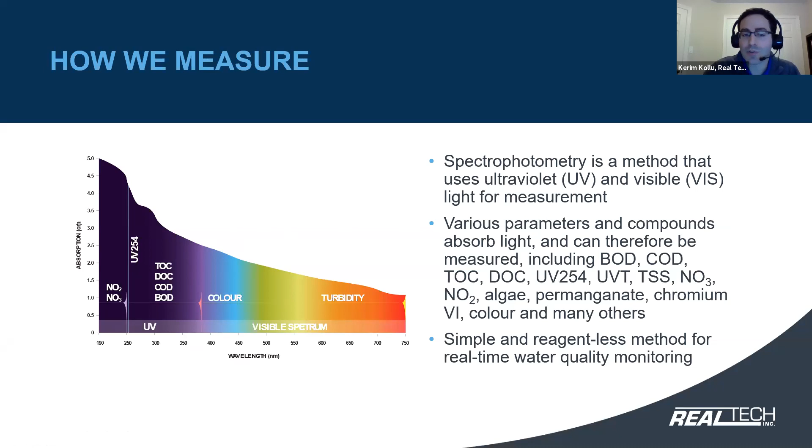One thing about using light technologies is that light sources produce light in a fluctuating way. The light fluctuates a lot during real-time operation, and that has to be compensated for. Real Tech has innovative ways to deal with this, such as patented and proprietary technologies to overcome this problem, and we also use different light sources.

Now, I mentioned this because it's really important. When we talk about real-time monitoring, it's actually really important to realize what the goals of the end user are. You might be looking for something that gives you trending information that helps with real-time process control, and therefore you may not need very high accuracy.

The importance of that is that the solution that works for you does not need to be expensive. If you need accuracy, you might want to spend a little more money and get a more expensive solution that's more accurate, which will also require more maintenance. But if your goals are more about process control or simple trending, you might want to opt for lower accuracy, but also lower maintenance and lower cost.

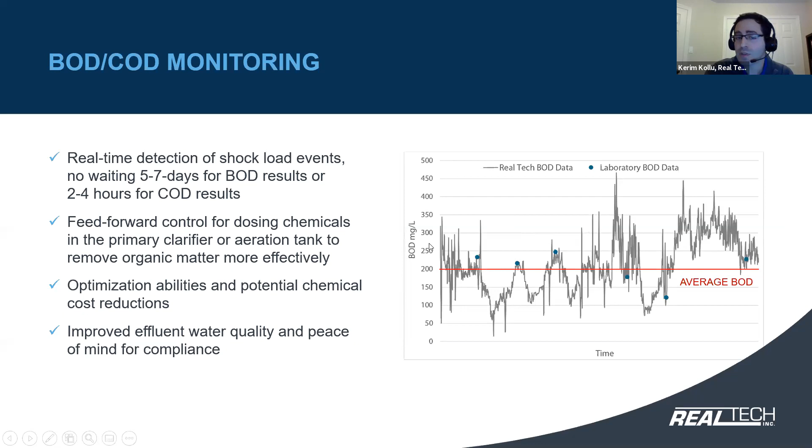Here we're looking at real-time data from one of our customers, over the course of 2 days. We're looking at BOD. The gray line is the real-time BOD fluctuation, verified with laboratory BOD data at several points. The importance of this graph is that if the utility was to look at the average BOD, all they will have is 200 milligrams per liter average BOD. This is useful information, but only to an extent. Throughout the day, the BOD goes much lower and much higher, and therefore there's much that can be done with process control.

One example of how the process can be controlled is where we see a lot of pain points in smaller wastewater treatment plants, where a sudden spike in the organic load coming in can really cause trouble with the aerobic system, the biological treatment system. The way smaller wastewater treatment plants deal with this is by boosting chemically enhanced sedimentation, which increases BOD removal. How much chemical is added is closely tied to the level of organics coming in, and therefore with real-time monitoring, it's very easy to optimize how much chemical to add.

Even if you're not looking at BOD, we can detect events in the incoming wastewater. What I mean is that because these sensors are real-time monitoring sensors, over time they learn the water, and the more they're installed, the more they know about it. Therefore, they're able to tell you what is a normal fluctuation and what is an anomaly, when you have a spike that's different than all the other spikes that happened before. Working through this data, we're able to tell our end users when these events happen, and what kind of events happen, which can be very valuable information as well.

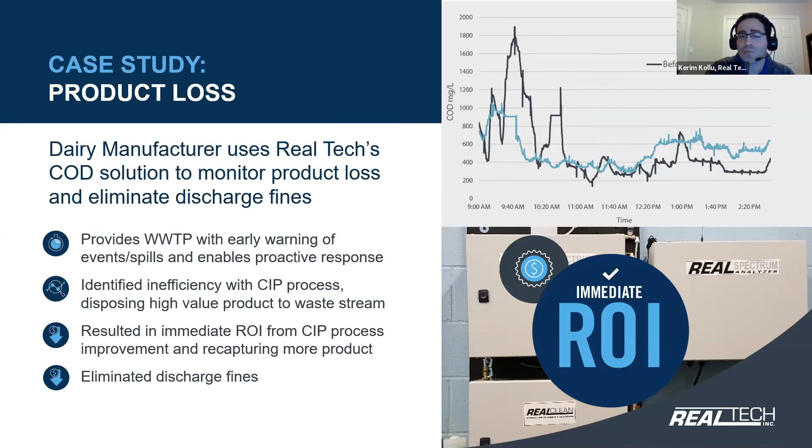So the approach here is a very multidimensional one. We don't look at just one parameter because BOD tells you the sum of organics, yes, but there might be other things happening with your process, and it's possible to monitor that using UV-visible spectrum absorption.

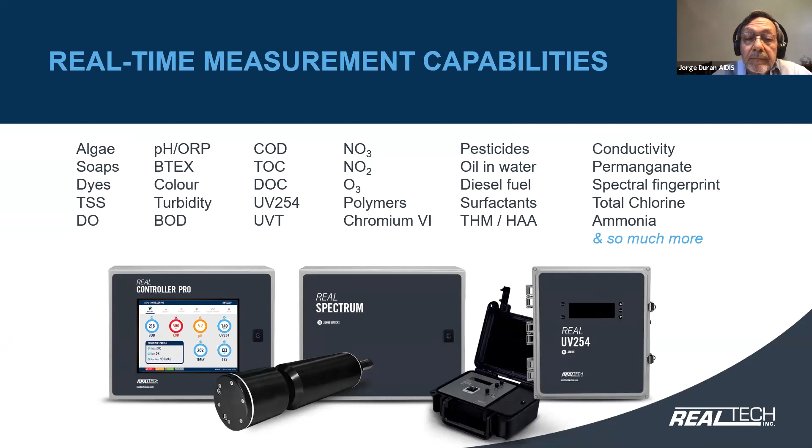I believe I don't have it in this presentation. However, Drew, do you have something you can share on the screen? Probably not quickly enough.

Let me see. Oh, actually, I might have — sorry, I apologize. I do have a picture in one of the slides, I think I saw it.

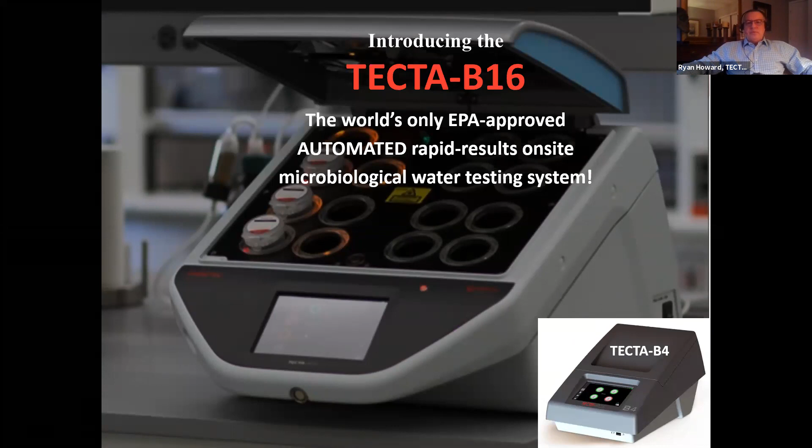The product that I'd like to introduce you to is called the Tecta B16. To repeat what she just said, we are the world's only US EPA approved, fully automated, rapid results on-site microbiological water testing system.

A little bit of company history. Tecta was developed in response to a water contamination event that happened in Canada back in the year 2000, where well water got contaminated in the town's drinking water system. That town is roughly 5,000 people. 2,300 people got sick and 7 people died. As a result of that event, there was a government investigation into the root cause of why that happened, and they reached out to academia across the world and leading researchers to come up with a solution.

The root cause that was identified was the way we test water, and there were a lot of inadequacies. There hasn't been a lot of new innovation in this area.

In the year 2003 at Queen's University, under the lead direction of Dr. Stephen Brown, the first prototype of the world's first automated solution for water testing was developed. One of the largest companies in the world, Veolia, ended up buying the technology and refining it, commercializing it, getting the US EPA approval. And they built a global water platform, leveraging that technology for the water plants that they build and manage.

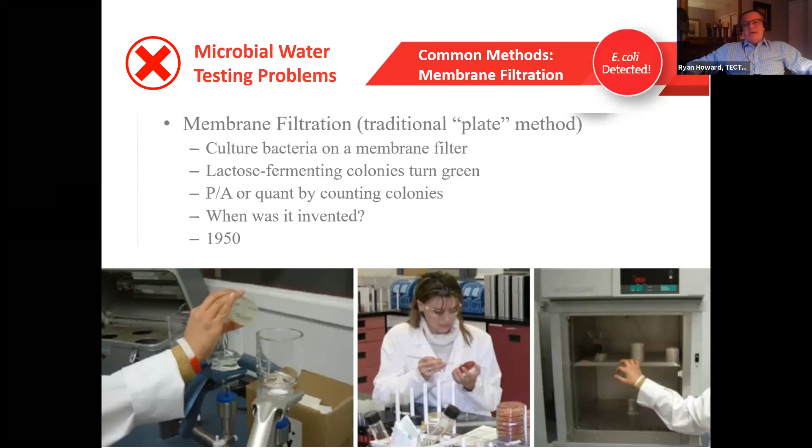As you can see, this is what some of the plates look like.

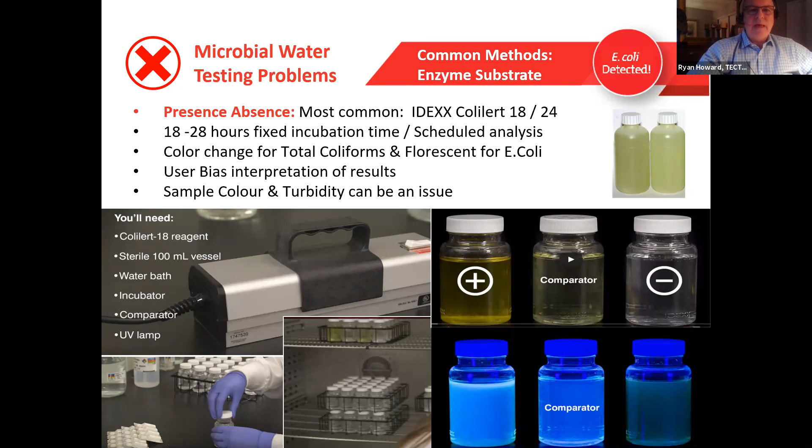Sometimes water samples can be turbid and have color, which makes this testing method sometimes challenging. It also relies on being done in a laboratory environment by a certified lab technician, and requires a fixed incubation time. To do quantification, you need more equipment, and it requires additional steps and time.

Again, IDEXX has the leading technology for this, which is called Quanti-Tray or Quanti-Tray/2000. Again, it's reliant on a visual interpretation, a lot of steps involved, and it's prone to human error.

The other big challenge with the micromethods today is the time to turn around test results. So there's obviously a process that's involved in terms of prepping, doing the incubation, the analysis, and communicating the results. In some cases, you need to ship samples to a third-party lab or to an internal lab.

And this process can take anywhere from 1 to 5 days. The deaths that happened in Walkerton in Canada were a direct result of the time delay in getting the test results back because they didn't know the water was contaminated. And as such, they were unable to issue a public warning or a boil water advisory.

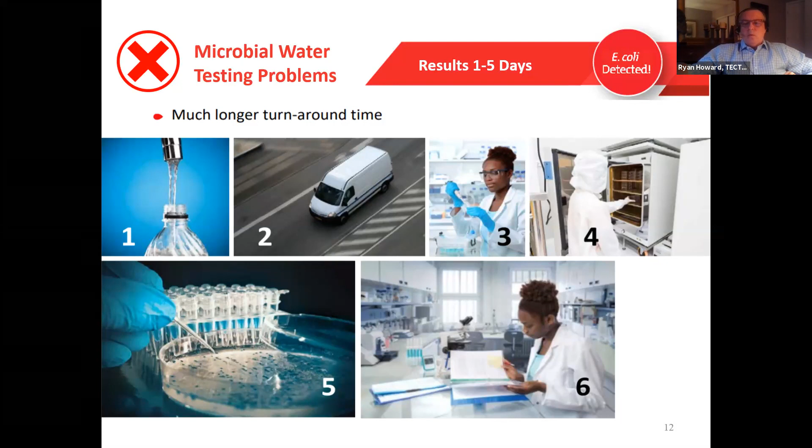There is a better way. And so TECTA set out to revolutionize the way that we test water. And so we've developed the world's first fully automated system to do this. It is a far simpler testing process.

The solution is simply a benchtop unit that's portable. It contains incubation chambers. We provide an all-in-one test cartridge, which contains the reagent and some software. I'm about to show you a video, which gives you a tour of the TECTA B16.

The TECTA B16 has a power switch located on the right rear of the instrument. On both sides of the instrument, plugs can be removed to externally sample the temperature of the 4 incubation mantles. On the left rear of the instrument, there is an external USB port that can be used for connecting peripherals such as keyboard, mice, and barcode scanners. An Ethernet port is located above the USB port for network connectivity.

On the front left bezel of the instrument, there is a second USB port. This can be used for the same peripherals and is convenient for connecting USB thumb drives. The TECTA B16 is equipped with a 7-inch touchscreen that can be operated with bare hands, a stylus, or gloved hands.

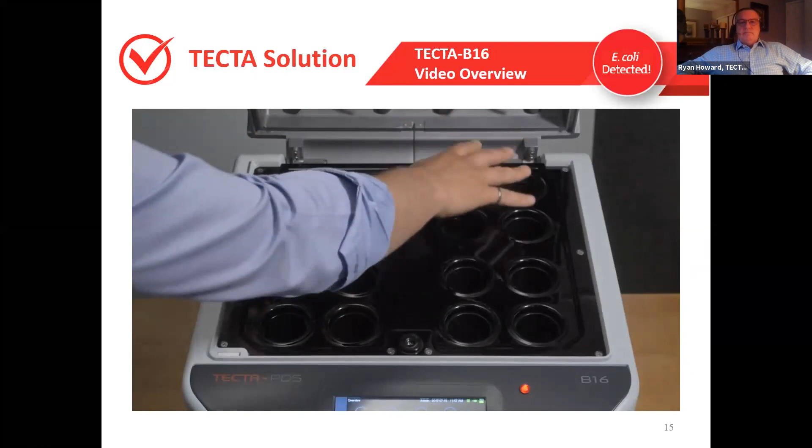Opening the service lid reveals the TECTA B16 optical system and how the optical probes self-align to the cartridge. It also reveals the simplicity of the unit for maintenance. The B16 can easily be maintained by ensuring optical plates are clean, and if the plates themselves become compromised, they can easily be replaced.

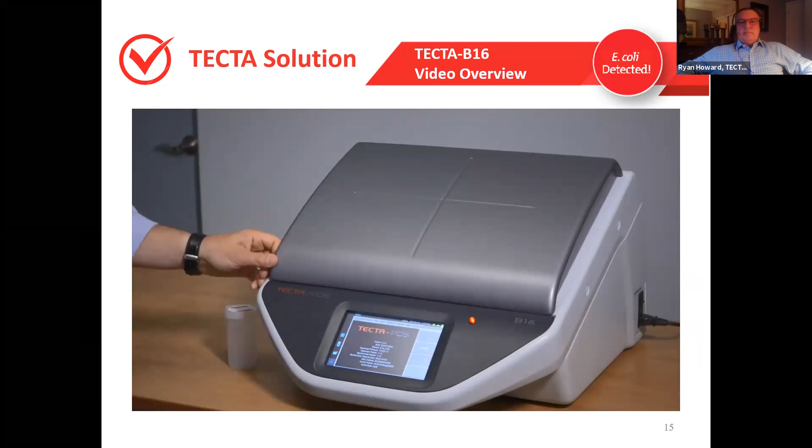The overview screen shows the status of the 16 chambers. On the icon bar on the left, you can either add a new test or review information from previous tests, or go to the Home menu where you can change system preferences.

For example, you can set the language preference, set the time, set your network information, or set customized email preferences. Many other customized preferences are available.

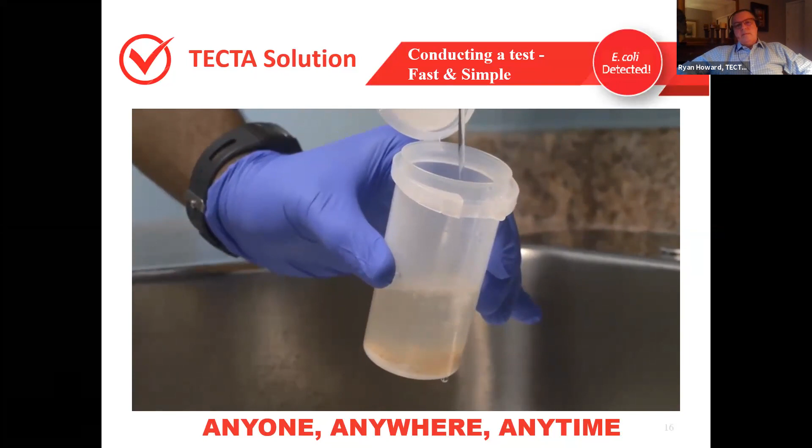If sampling a tap, place the cartridge at a slight angle with the front of the cartridge facing the water flow and fill up to the 100 milliliter mark. When the cartridge is filled, keep it on an angle and tap a few times to ensure no water has accumulated in the lip of the lid.

Place the cartridge on a flat surface, place the tab into the locking tamper-proof closure, then press securely around the lid, ensuring a watertight seal. Take a dry cloth and wipe the outside of the cartridge and ensure no moisture is on it. Inspect the bottom of the cartridge to make sure the polymer sensor is clean and moisture-free.

Ensure all media is fully dissolved by gently swirling the cartridge for 30 seconds. Let it sit for another 30 seconds and gently swirl again. Do not shake or bang the cartridge down at any time, as it could damage the polymer nub on the bottom and/or create bubbles, which could affect the test.

Go to the Add Test icon. Add the sample information into the TECTA by either using a barcode reader or manually inputting the sample ID. Once sample ID is added, hit Add, and then go to the Overview icon. You will notice the chamber to be used is blinking amber on the touchscreen.

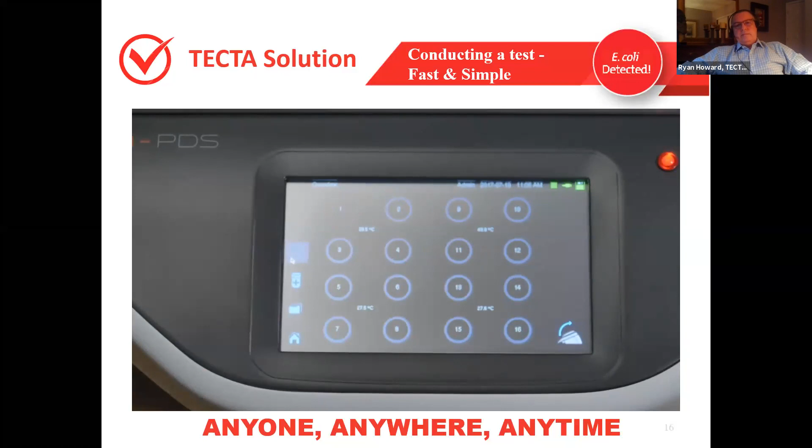Open the lid, place the cartridge with the front facing out. Close the lid, wait for the blue progress bar to complete the scan of the unit. The test will begin automatically once this has been completed. Once the test is started, icons turn solid gray.

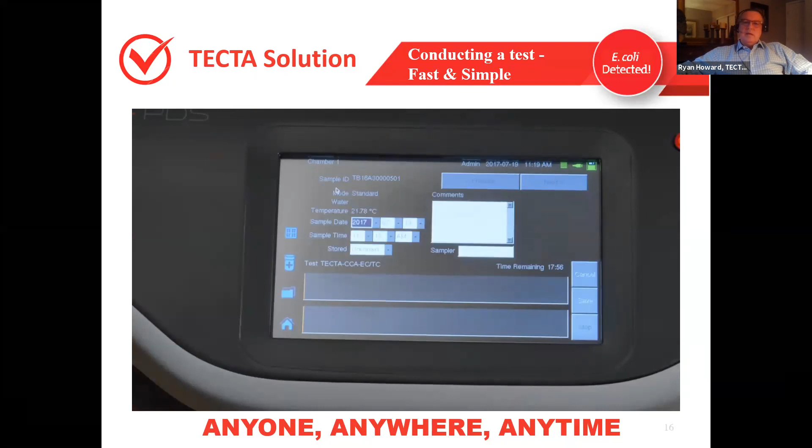At this time, one can click on any gray icon to enter additional comments or information. As soon as target bacteria has been detected, the chamber icon will turn red. If absent for target bacteria after full incubation time has elapsed, the icon will turn green. Click on the colored icon to review the completed report.

Alerts and completed reports can be sent via email to anyone, anywhere, in real time.

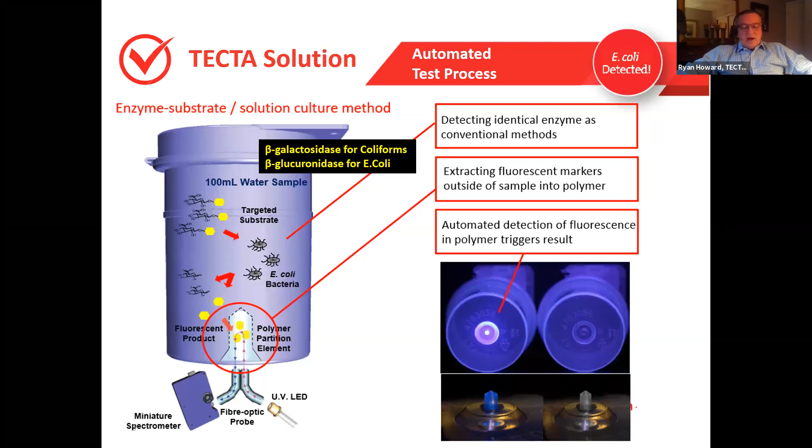High levels of bacteria can return test results in as little as 2 hours, with lower levels taking longer. A no presence result is returned after 16 to 18 hours, depending on the test type. If E. coli and total coliforms is detected, an email will be instantly sent at the time of detection.

The alert email will include the full report, which is automatically generated and can be sent to anyone, anywhere, at any time.

The reports are hard written onto the device. They can be accessed through a thumb drive, but they can't be changed, which adds integrity to the testing process. It includes all the detailed information that you enter at the time of the test. Plus, we're reporting incubation intervals for every test that's conducted in the unit.

Tests also can have a CSV file attached, which can be used for integrating test reports into a water management system such as LIMS.

The true advantage with Tecta is our speed to result. Conventional methods, like I said, can take 1 to 5 days. With Tecta, our results can be delivered in 2 to 18 hours.

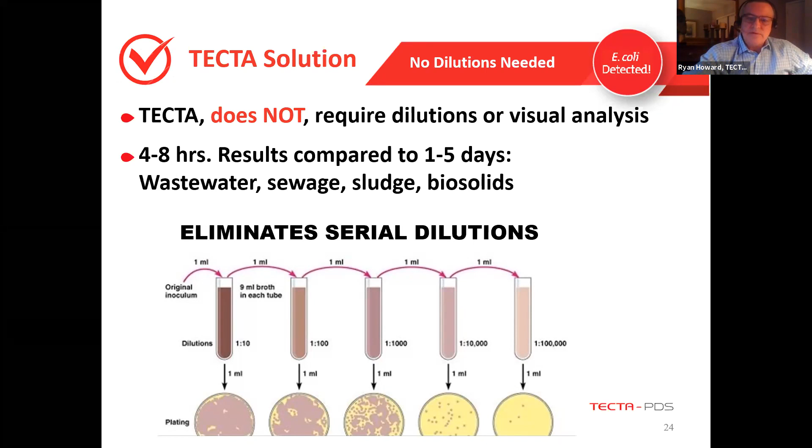Tecta is not impacted by color or turbidity, and other test methods are.

One of the key advantages of Tecta is that we're able to provide a solution to add lab capacity and increase productivity. Traditional labs are restricted to normally Monday to Thursday testing. Often they don't test after hours or on Fridays, Saturdays, or Sundays because they may require to pay someone overtime to come into the lab to do testing.

With Tecta, because it's an automated process, once you've launched the test, you literally can leave and the test results will be sent to you by email.

We're approved by the US EPA for drinking water. Our method type, if you're interested in Googling to see what it is, is called Tecta ECTC.

We're approved by Health Canada. We're also approved for food and beverage by AOAC International. We have NATA accreditation in Australia. We are approved by the Philippines Department of Health, New Zealand Ministry of Health, and the National Institute of Environmental Research in South Korea. The US EPA did a very lengthy 3-year study on our method against all other commercially available micro methods for water testing and compared us.

And we came out on top across every category. The EPA summarized stating that our method was the easiest method to use and eliminates the need for a technician. There were further comments about how sensitive and accurate our method is.

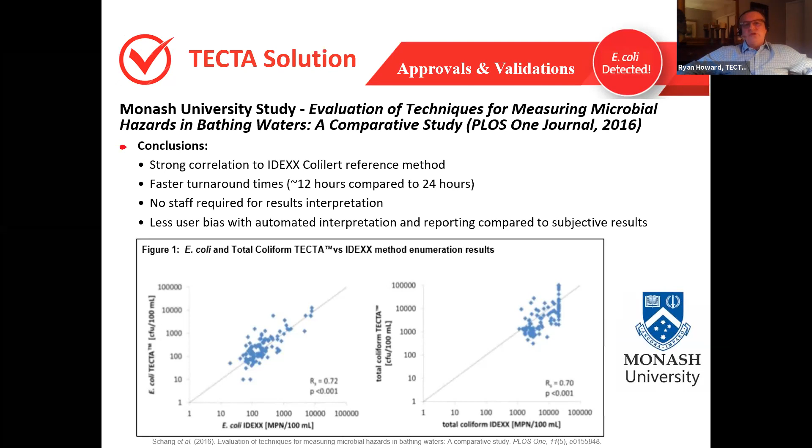Monash University did a study to evaluate us against IDEXX Colilert, and the conclusion was that we had a very strong correlation for quantitative performance against Colilert, and that we had a faster turnaround time of roughly 12 hours versus 24 hours. So we shaved down the entire test process by half.

Here are some of our global customers across 40 countries. We're working with some of the largest companies in the world across various sectors. Some examples: City of Chicago, Rio Tinto, one of the largest mining companies in the world, and Intertek, one of the largest commercial laboratories in the world.

Sinopec, an oil and gas company, and Veolia, one of the largest water plant developers, are clients. The Olympics had recently chosen our method to test recreational waters for future water sports in the triathlon events. The applications and industries where Tecta is most commonly found include drinking water, wastewater, sewage, sludge, biosolids, main breaks, and recreational waters.

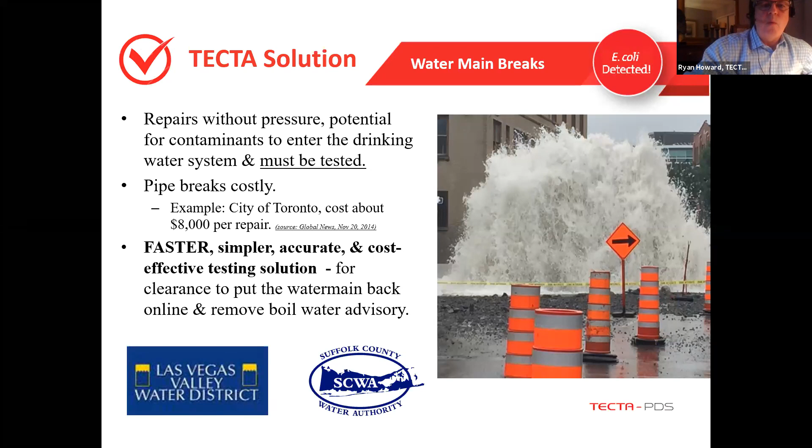Sewage, sludge, and biosolids are very high value applications because we're able to provide results in 4 to 8 hours compared to 1 to 5 days of conventional methods. For recreational waters, beach water testing, the State of Rhode Island has partnered with us and the United States Surfers Association to test ocean water off the beaches in Rhode Island. Like I said, the Olympics and the ITU World Triathlon Series is using it to make sure the water is safe for water sports.

Mining companies, Rio Tinto, BHP Billiton, Kinross, some of the world's largest miners, are using Tectas on site at the mining camps to make sure the drinking water is safe for employees. Some of the largest commercial labs and public health labs in the world, SGS, Intertek, Maryland Department of Health, and many others are using Tecta for public health purposes and making sure the water is safe to drink.

Universities across the world are using it for research and project testing. For example, at the University of Miami, Tectas were used to measure the water after Hurricane Irma that was going back out into the ocean.

In food and beverage, we're working with Nestle in a manufacturing plant, where they use Tecta to test the water for washing down the equipment for baby food before they move to a different process within the manufacturing facility. Also, the FDA and Myanmar are using it for public health inspection.

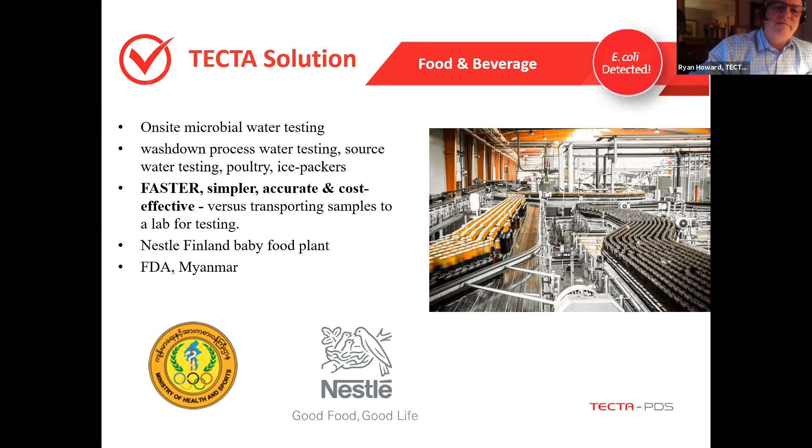Sydney Water and PUB in Singapore have installed Tectas on the back of their service vehicles. The driver drives from one sampling point to another and launches a test, speeding up their overall testing process and efficiency. A great example would be if a restaurant calls in because the water doesn't look right, smells off, or is discolored - they can send out a service vehicle, take the water sample, launch the test, and drive to the next sampling location. The results will be emailed to the driver, who can get back to the restaurant and let them know what's going on with the water.

In pharmaceuticals, we're working with pharmaceutical companies for process testing of the water used in their production. In oil and gas, this can be used at an offshore oil rig where they have a unit on site to make sure the crews have safe drinking water rather than flying samples in to a nearby lab, or at a manufacturing facility.

Just a couple others: for Aboriginal peoples, we have close to 100 units now across Canada. These are remote communities where we're providing a way to test the water on premise. Ferries, military, irrigation, and environmental samples are also very prevalent applications for Tecta. We fit very nicely into these industries, and we have a myriad of success stories on our website. Thank you.

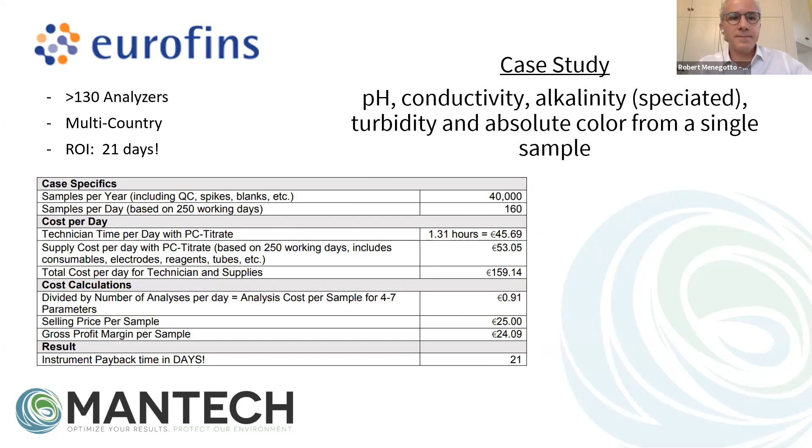So they have to have internal wastewater treatment - El Paso as well as the embassy - and monitoring for security, and the key is internal. In the case of El Paso, it's multi-industry sewer discharges, food and beverages - for example they've got biofuels, dairy, nuts, a Coca-Cola plant, oil recycling, packaging, textile as well. All these factories putting wastewater down the sewer, of course, with their permits.

El Paso is checking them to make sure things are fine. The North American, and I believe also South American and many countries around the world, permit is often based on BOD, which is a 5-day test. So a 5-day test is completely useless for any actionable decision-making - very good for checking compliance and issuing fines.

So we manufacture an automated analyzer to do the 5-day BOD following the ISO EPA method - been doing that for many years. But it's very useful, for example, for the city of El Paso, who learned about this, the city of Calgary now, and this embassy, just to get a snapshot - what is that BOD that just came in?

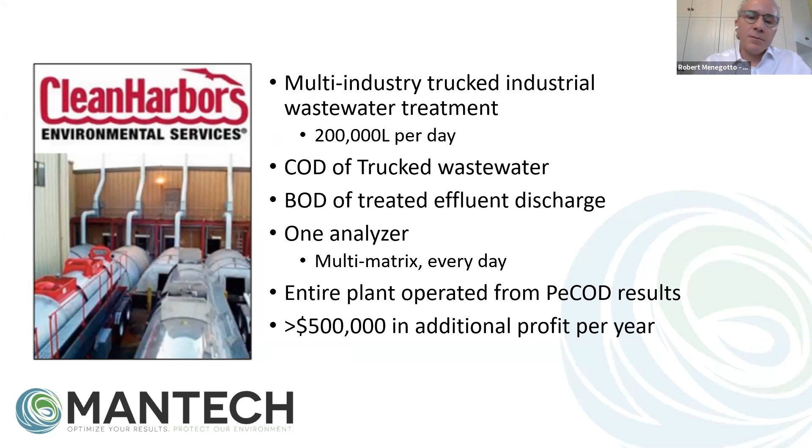And because of the strong BOD analysis capabilities of PeCOD, they know the BOD of that treated effluent down the sewer well before the city does, meeting their permits. It doesn't matter if it's automotive, a refinery, a brewery, or a sugar plant - multi-matrix every day. The entire plant is operated from PeCOD generated results, generating roughly $500,000 additional profit per year for this company in the one plant.

A little bit of a Latin American success story, and very good for the companies Arauco, CMPC, and Biopapel. Basically, PeCOD has replaced the Hach dichromate method - multi-matrix, multi-point treatment testing, so it doesn't matter. Multi-units in single mills now, because they realize the value of this test and increase the amount of testing they do. So if one PeCOD unit is busy, even only for 10 minutes, and another sample comes in, they get going on it right away.

Arauco, who's got many units now, realized more than $3 million in additional profits in the first year of PeCOD adoption and operation.

So in general, industrial wastewater spans multi industries. I'll highlight Kemira, a supplier of chemicals for wastewater and drinking water treatment. Kemira is utilizing PeCOD to support their customers, putting PeCOD in the back of their technical support representatives' cars and going on site, so they can go from one site to the next and provide quick troubleshooting snapshots for their customers.

We're involved in anaerobic digestion, AOP control, feedstock control—very important because you can kill a lot of microbes if your COD goes over spec—nutrient optimization, and in our oil sands area, pond to pond to river movement. It's all very quick, reuse and effluent compliance. Our mission, again, is fast and green. It's what we're delivering, and our customers are realizing the benefit of that.

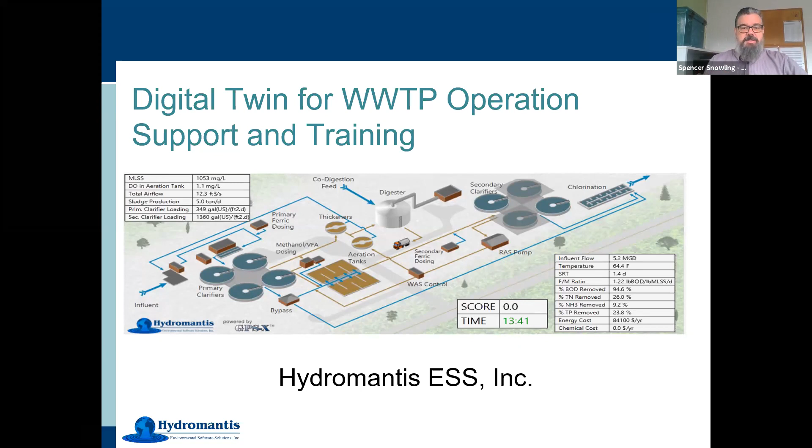Thank you very much, and good morning, and thank you for allowing me to present to you. I'm going to be talking about a somewhat different technology now than some of the earlier presentations. What I'm going to be talking about is a software package that allows you to have a digital twin of a real wastewater treatment system, and then use that as a way to train operators and to provide operational decision-making support to your operations staff.

So I'd like to start out by introducing our company, Hydromantis. We've been around for over 35 years now. We are most well known for making simulation software for the water and wastewater industry. Our packages are shown across the bottom of this slide. We're probably most well known for GPS-X, a tool used by engineering companies for the design and optimization of wastewater treatment systems. However, we've now moved into a new area over the past few years where we've developed a package called SimuWorks.

SimuWorks is taking a GPS-X model and changing the interface so that it can be used to teach people about the activated sludge process, and also to make it very easy for people to use the models created by our software. The idea is that you can make a digital twin of your plant and allow people to run simulations of that facility under different conditions.

You can simulate typical performance, or make very bad things happen in the simulated plant, and then see how the operators will address those issues.

We have been approached to do this because throughout the wastewater industry, there is now going to be a significant loss of process and operator knowledge anticipated over the coming decade. The wastewater field has a large number of staff, and biological activated sludge treatment is a complicated process, so a lot of that institutional knowledge and experience is going to leave the industry as those people retire.

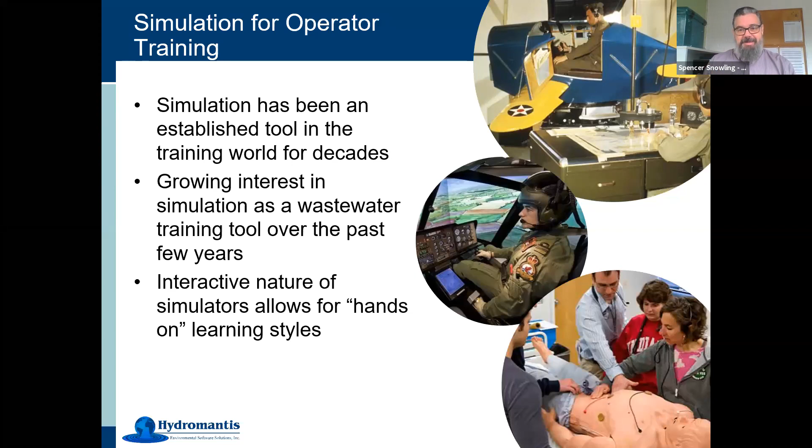There are actually a lot of benefits of having good operational staff. There is lots of literature showing that better trained operators lower your plant costs in terms of operations, and having staff that understand how things are going to happen allows you to run a more robust and consistent treatment operation.

At the same time, there is a lot of literature showing that using a simulator is a very effective way to convey information to a person learning a new topic. This is particularly true for students and new trainees who learn in a practical, hands-on way - people who learn by doing. We've had a lot of success with our simulators and digital twin environments for people who like to experiment and learn by playing with the system, in order to understand how all the individual parts of a fairly complex system fit together.

So what we have is a package called SimuWorks. It is a digital twin of a plant that allows me to run a simulation and get instant results back showing how the plant is performing under these conditions with this influent loading, and allows me to make changes to the operation of that plant.

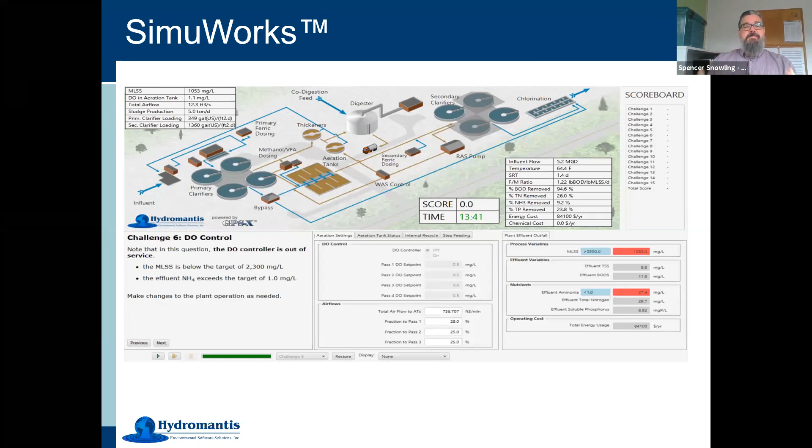So what I'm going to do now is switch my presentation to my desktop so that you can see the simulator running.

Okay, so this is SimuWorks. If I run a quick simulation here, this tells me how the plant is performing. I can move my cursor around different parts of the plant and click on different unit processes, like the bioreactors or the secondary clarifiers, and control what is happening there the way you would in reality.

I can turn on a DO controller and set the set points. I can click on the wastage and set the pump rate for how much sludge we're going to waste from this system. And it's telling me immediately in this right-hand panel how this system is doing.

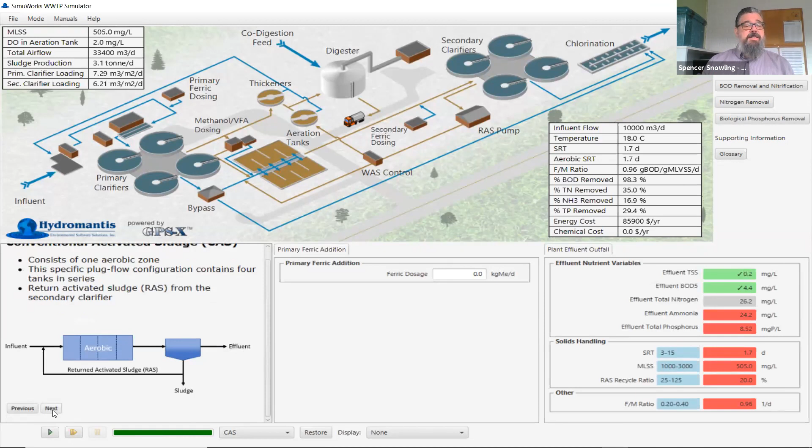If I click on nitrogen removal, then click on the lessons for nitrification, there's a lesson here that people can go through at their own pace, on their own time, as they move along—a bit like a website where you can go forwards and backwards. It starts by describing what a conventional activated sludge system is that does nitrification, then describes what the processes should be, how they're supposed to work, and the typical ranges for operating a plant that does nitrification.

So what it does is leave the user with a challenge, an assignment they have to do. And in that case, we can see here that the plant is currently not meeting those targets.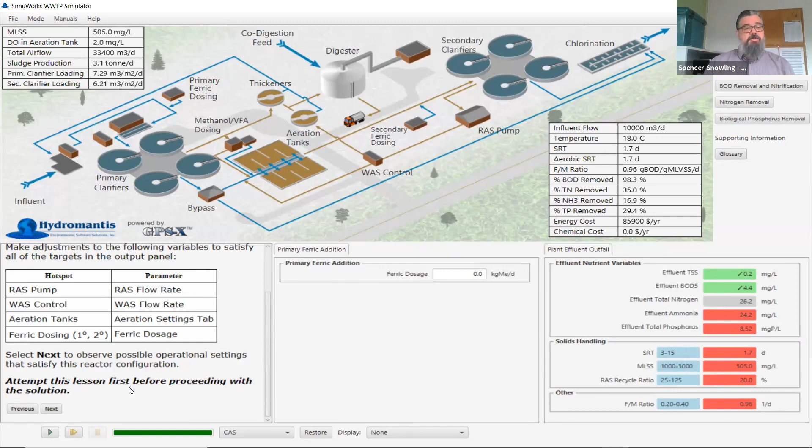We can see there's lots of things in red here that need to be fixed. So what it's telling us is that we want the users to make adjustments and then run simulations while observing these results. The lesson will take them through and describe all of the important things they need to know to solve this problem.

First of all, we're not recycling enough. Our recycle ratio is actually much lower than it should be. So what it's telling me here is if I click on the RAS pump hotspot, this really should be more like 7.2 million liters per day. So if I rerun that simulation, we can now see that I've met that target and some other things are now starting to come in line.

But my mixed liquor is still very low. It's only 900. So I can click to the next step, and it talks about that fact. It was saying, really, we are wasting too much sludge. Let's dial this back here. So I'm going to go to 170, and then that will take us to the next step as we go through the process. Now everything is good on the nitrification side, but we're still not meeting our target phosphorus.

So we can move through these different processes at a rate that everybody is comfortable with. Each individual user can proceed at their own pace.

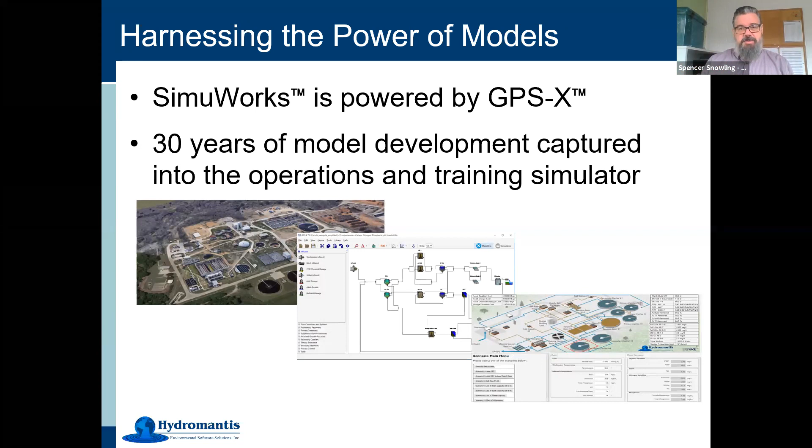So I'll show you a few examples of some that we had here. We have a sort of common aesthetic look and style to it that's looking at the plant from above so that people can click on different things. Many of these examples here are in the United States and in Canada. We've done very complex plants with this one in Texas, and very, very simple plants.

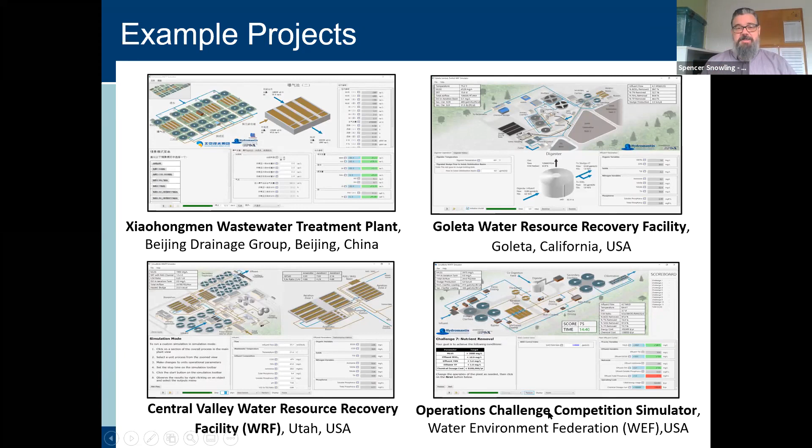We've also done them in many other different languages. Here's one that we did in China. We've also done them in Denmark and other places around the world. We don't have one in Argentina yet, but we do have users of our software there as well. And one of the things that's been really fun and interesting is to use this simulator as part of the operations challenge competition. I'm going to come back and talk about that a little bit later.

So what I'd like to do is take the concept of how we use this as a training tool and extend it for facilities that have a simulator of their own facility, a real world digital twin. These people use this not only for training, but for testing and understanding how their system works when they need to make changes to the operation.

This is a facility just outside Salt Lake City in Utah, and we've had this facility using our software for many years. Myron Bachman, the superintendent at that plant, has told us many times that he uses the software to help make decisions and educate his operators about where they're going. They use the model every month or two, as new changes come online, to test decisions in the simulator before implementing them in reality.

We're also able to do a lot of documentation as part of our system. For the small plant located nearby, we've built a system where when people complete training exercises, they can produce a document illustrating how long, who the person was, how long they spent, and what information was covered in that exercise.

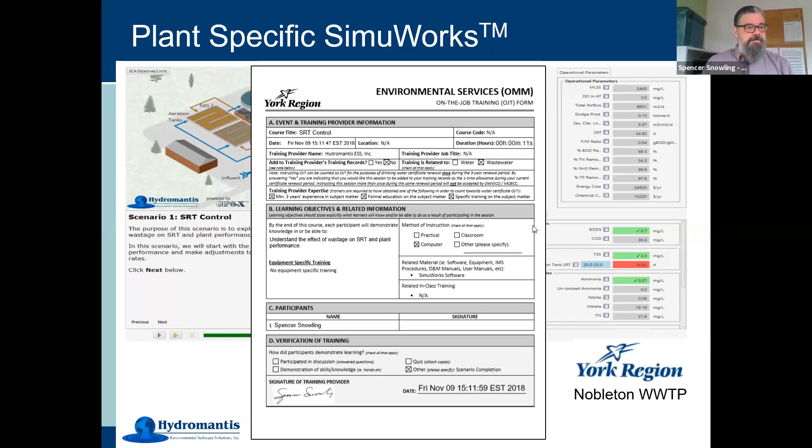So it has two uses in that sense: it can be used for training, and it can be used for operational decision-making advice.

Over the years, we've had to make sure the software was easy enough to use that anybody could sit down and get started, and understand what the model is trying to tell them. With this digital twin, they may understand which buildings to click on, but we want to make sure we have acceptance from those plants, that they agree this is a useful tool. We've had many attempts at this over the years.

But SimuWorks has really been the breakthrough for us, where we were able to make an intuitive design that allows people to do it in a very hands-on kind of way.

I mentioned the WEF, the Water Environment Federation Operations Challenge competition earlier. We've been using that simulator as part of the competition for many years, putting a simulator in front of the teams. They do it as part of the very first event, the process control event. We give them plants that aren't meeting their required effluent quality, and they have to troubleshoot and fix the problems at each simulated wastewater treatment plant. So the digital twin gives these people a challenge they have to sort out and fix, and we've had really good success with this over the years.

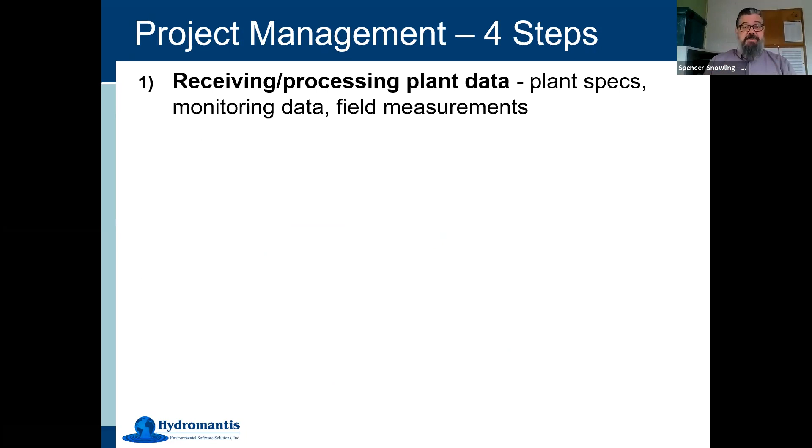So I think I'll conclude here with a few slides about how these things go forward, how we build these things for you. If we were to proceed in building a digital twin of your plant, we have to start by receiving all of your specifications about your plant. We need to see the drawings, the measurements, and the regular data that you will have collected over time. We then build the model in-house here in our office and match those model predictions to the field measurements and the data you gave us. We calibrate the model so that it produces the correct results.

We work with you to define what lessons you would like your operators to learn about while using the digital twin. We build lessons around those topics, usually 5 or 6 different lessons based on different topics that are important to you. And then we hold an online training session for half a day just to get everybody familiar with how to use it.

The costs vary. It really depends on the complexity of your plant. It's a lot more work, obviously, to set up a digital twin of a very complex plant. So the way we usually do it is we would like to learn the details about your plant, and then we can provide you with a proposal that covers that. There is a fee associated with setting it up in the beginning, and there's a cost for that. And then there's an ongoing annual license subscription to keep the software going.

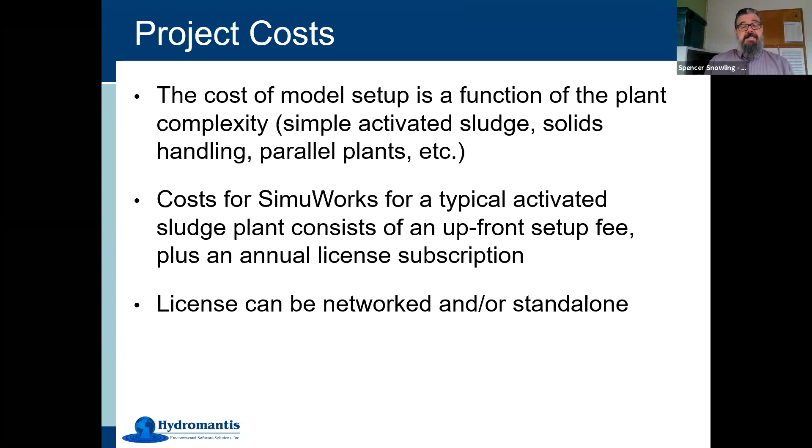And we come back and chat with you every year to determine if there are any changes you've made to your plant that we need to reflect in the digital twin, and if there are any new lessons that you would like, and so on. These licenses can then be on standalone computers, or they can be networked together.

Usually this is a project that takes us, with some back and forth of information exchange between yourself and us, and we have a beta testing period and so on. Usually those are things we can do in 3 to 4 months, and we would just like to learn more about your plant if you are interested, and we can keep in touch.

So to conclude, it is a completely unique product in the wastewater industry. SimuWorks is the only thing that is being used in this way by WEF and by others. And we have really received solid acceptance from operators on the front line through its use in the Operations Challenge competition and through the training programs as well.

And I'll end by saying the biggest feedback that I've always gotten from people who use these simulators is that they are fun. They are fun to use. It is a really nice way to have very strong engagement with your staff. It's fun to run the plant and to break it and then fix it again and understand it. And it's a really nice way to get people excited about learning about how these systems work.

Okay, so I'd be happy to answer any questions.

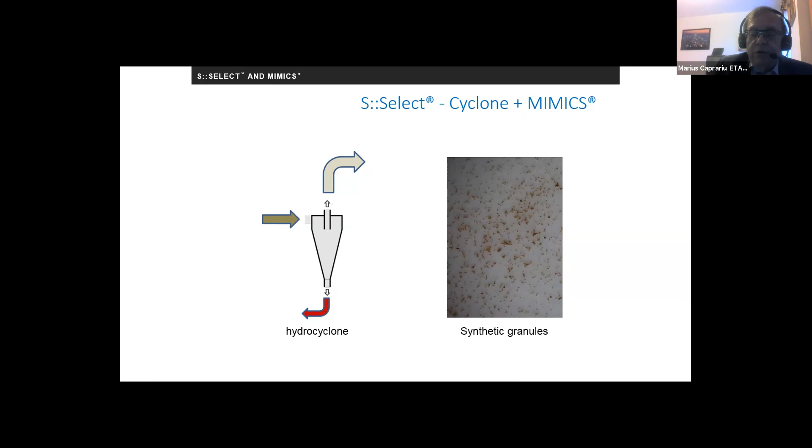I'll show you the mimics, which are synthetic granules that we add into the wastewater. These are added only once, to try to produce the granulation. They come from Chile and are exported here into Canada. They are introduced into our tank to enhance the operation and start producing the granulation.

How do we change the system? It's a very simple addition. In a normal conventional wastewater treatment plant, we have the aeration tank and then the secondary clarifier. We take the return activated sludge and return it at the head of the aeration tank. But all the waste activated sludge that normally goes to the thickener will instead go through our hydrocyclone.

So in a big plant, in a conventional activated sludge plant, the only change is that we have our hydrocyclones on the waste activated sludge line. So what exactly happens? Well, as we have the hydrocyclones, we introduce the mimics, the inert material, into the wastewater. Here you see them, they are virgin. There are no attachments to it.

And then because we apply load into the aeration tank, we will create the heterotroph bacteria. So then we produce the AOBs, NOBs, filamentous bacteria, nitrosomonas, nitrobacter. Well, these bacteria, as we know from other attached growth systems, they will attach to our mimics, and they will not swim on their own.

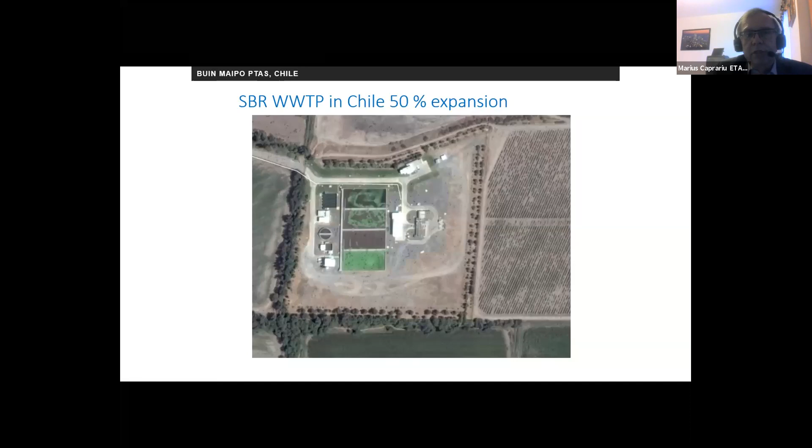The plant was designed to treat wastewater coming from approximately 60,000 people, and they were exploring a 50% expansion, so that's like treating 90,000 people. We participated in a tender, and we had two options. One option was to provide 2 additional SBRs, as you see here. They're a little bit longer because the site did not allow to have the same geometry of the tank. And of course, provide a secondary thickener, another digester, and upgrades to the preliminary treatment.

With our technology, the second option, S-Select, we expanded the plant and kept only 4 SBRs. So instead of constructing 2 additional large tanks, we provided the expansion with only 4 SBRs. The construction time decreased from approximately 2 years to about 6 months, a major reduction in construction time. But at the same time, the capital cost for the biological treatment was reduced in half. So those are the key parameters that were at the beginning explored by Aguas Andinas. Of course, there is a lot of other benefits in terms of the effluent quality.

So this is when we started the project. We signed the contract, I think it was end of June 2018. By middle of September, all the equipment was already shipped and installed in Chile. So you can see it was only like 3 months turnaround for the equipment to be there.

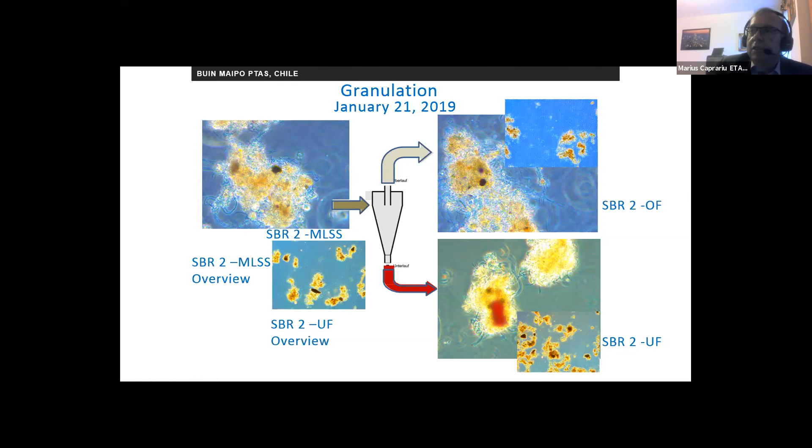So this is a picture showing what, when we start the mixing into the SBR, what is the mixed liquor.

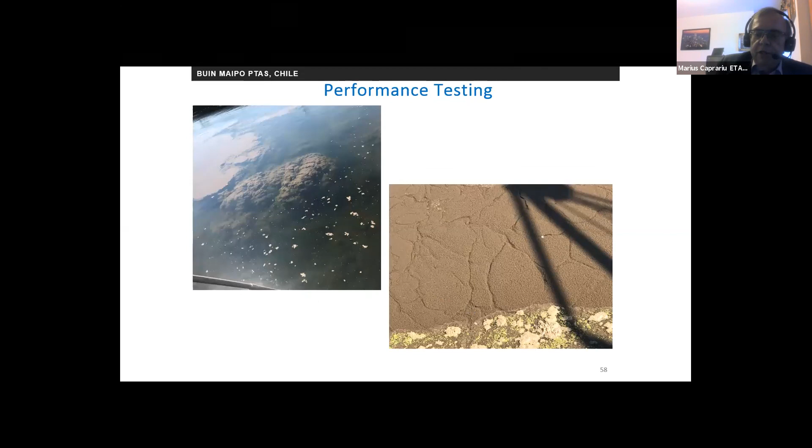And then you can see the difference here between a normal mixed liquor and our conventional aerobic granular activated sludge.

So in terms of benefits, we produce a turbidity of less than 1 NTU. The total nitrogen in the effluent is less than 3 milligrams per liter. The phosphorus is less than 3. And we increase the dryness of the cake by 5%, also cutting the polymer consumption.

The second technology is treatment of highly concentrated ammonia streams.

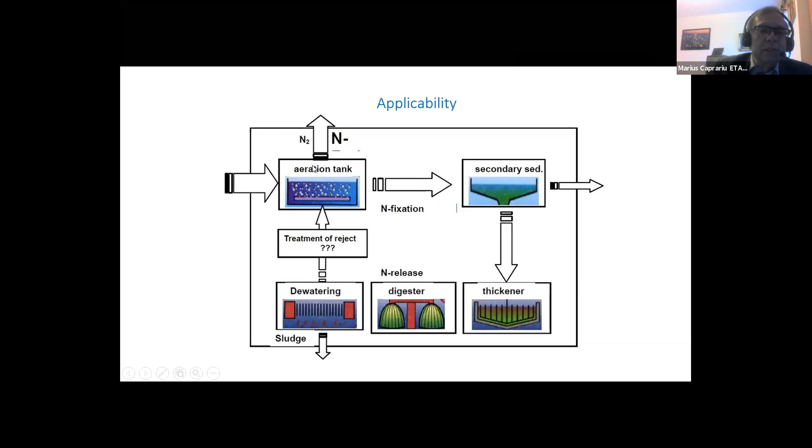So the question comes up: how do we treat that? Is it better to treat it in the large aeration tank, or implement a smaller system that will treat the small flow a lot more efficiently?

So we have the Anammox bacteria that, as we explained with the nitrogen cycle, we have the ammonia, and then through the AOBs we convert it to nitrite, and then through the NOBs we convert it to nitrate. And then from nitrate we need additional carbon source because this stream comes from a digester, so supposedly we should not have any carbon left. We add methanol and we go and produce the denitrification.

So what the Anammox does is produce a short circuit from the ammonia. We oxidize through the AOBs, or nitrosomonas, and we produce the nitrite. And then from here, based on Anammox, we produce a short circuit and release it as nitrogen gas. Different representation, but the same concept: we go from ammonia, we apply only 50% of the energy, and then we produce the shortcut to nitrogen gas based on the Anammox bacteria.

Well, this plant was shown to you before, but it's the same plant in Glarnerland, where we do have an SBR facility. It's been in operation for more than 15 years, so it's not a new process. It treats about 220 kilograms of ammonia per day.

Here at the plant, as I showed you before but from a different angle, we have 4 aeration tanks. And this is the small tank that treats 25% of the entire ammonia. So when you think about it, it's very, very small compared with the large tanks that are here for removal of the nitrogen, BOD, and COD.

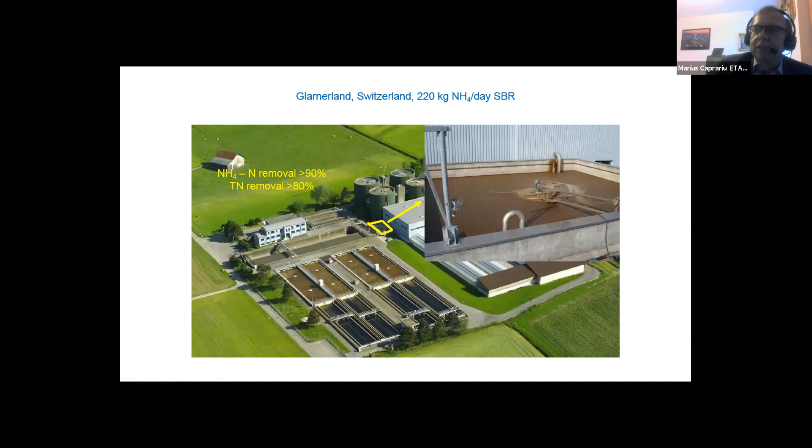Again, the technology involves a hydrocyclone, and that's kind of key to all our technologies because we produce a very good separation of the sludge. And then a representation with the AOBs, NOBs, and Anammox.

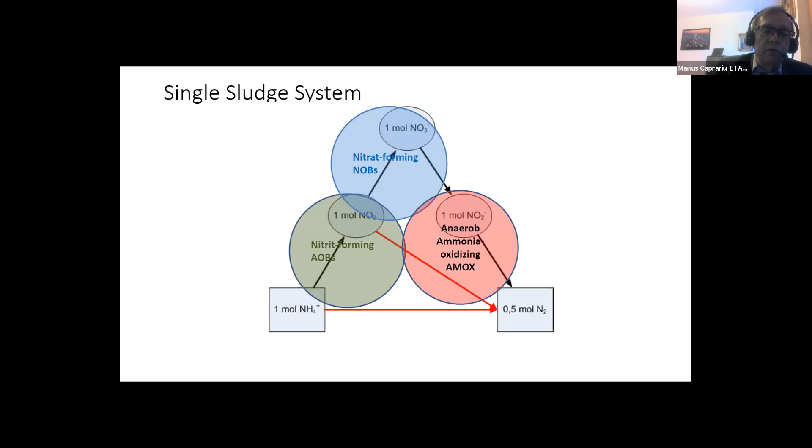Well, Anammox and NOBs, they all compete for the nitrite. So we have to find conditions where we can suppress the NOB, and we can also enhance the capability and make the Anammox thrive. The Anammox is 10 times slower in terms of growth than NOBs. So how do we do that?

Well, we have the same thing with the nitrogen triangle, and then through the hydrocyclone we waste the NOBs, and then we can produce a sludge that's mostly red bacteria. So when we have red bacteria, the Anammox process works very well, and then we produce a very good effluent quality.

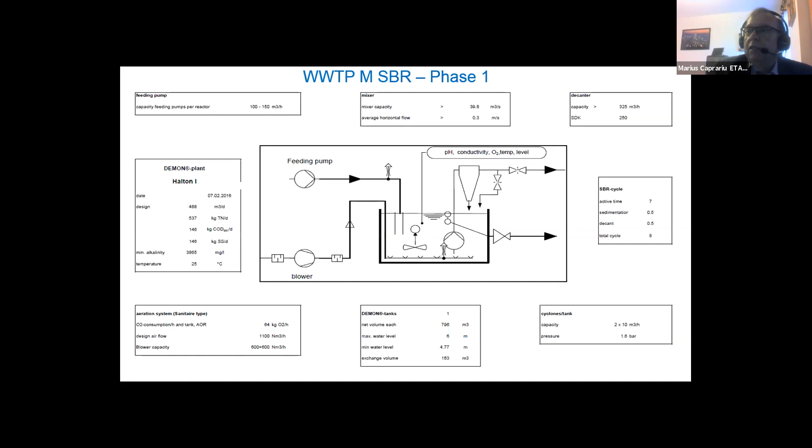So that's important because we have 2 SRTs in our tank. We've done the plants in SBR mode or in a conventional flow-through system. In the flow-through system, there is no decanter. The equipment is smaller, but the pump that provides the mixed liquor to the hydrocyclones is a little bit bigger.

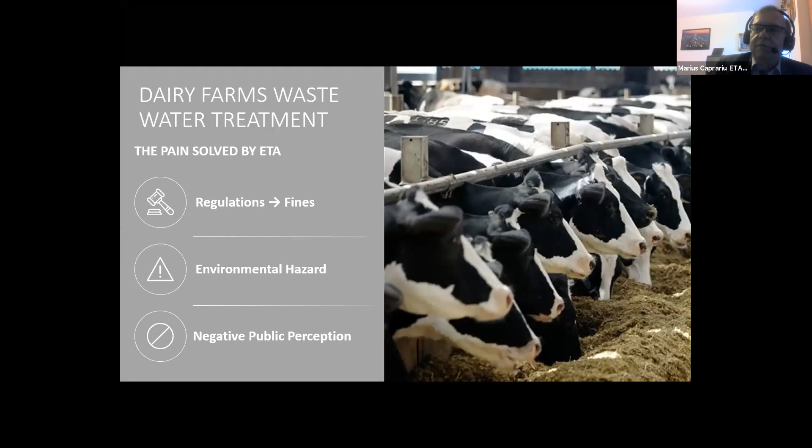The dairy farms produce a lot of manure, and then of course there are regulations that can result in fines. There is an environmental hazard, and also a negative public perception about it. When you look at dairy farms as a global problem, you can see the amount of waste produced per day - it's a lot more than what's produced by humans and pigs. Actually, between humans and cows, there's about 7 times more waste produced by the cows.

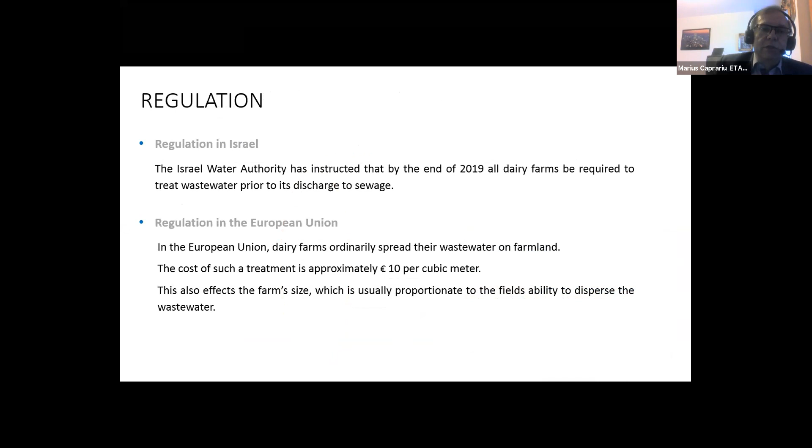So the technology came from Israel because of regulation. Of course, in Israel there are no pigs, so they did that on cattle. It was implemented in 2019 because of the new regulations. The technology, Claritech, is a unique, innovative technology that consists of compact coagulation, flocculation, filtration, providing the ability for a plug-and-play system that can be easily implemented for a lot of cattle farms.

So when we look at improving the sedimentation tank, we are looking at improving either the dissolved air flotation or the filtration system. As I said, this technology is very compact in size and footprint.

It's low cost in operating expenses. It's scalable because as you expand the facility, you can add more of these treatment systems to allow for more cows at the farm. It can be fully automated and remotely controlled. The residual sludge is already dewatered, and a construction permit is not required.

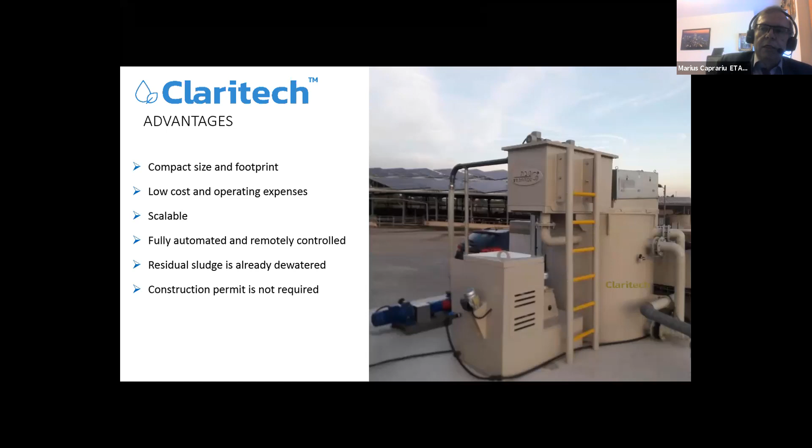These systems have a lot of instruments and control valves that allow us to monitor the treatment system even from Canada, from Israel, from other places. And when we see a problem, we can call the operators and they can make some changes to it.

In terms of the product family, there are systems for 350 cows, 650, 1,000 cows, but it can also be expanded to a lot more, depending - adding 2 or 3 systems together - to allow for a lot more cows.

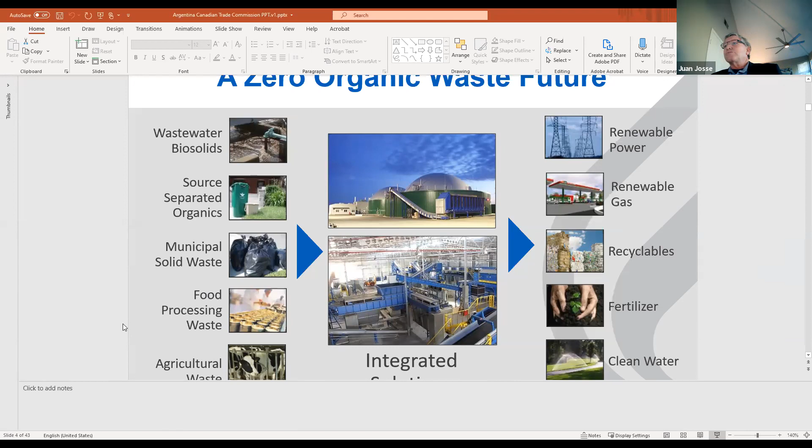Esta es quizá la parte... Sorry, Juan Josse, the presentation is not being watched. It's not moving? Okay, the presentation, you're saying it's not moving. Okay. Is it now? Can you see it? Yes, it is now, it is now moving. Okay, you are seeing 'Energia solutions to recover value from waste'? No, 'organics to value, expertise and technologies.' Okay, understand. Perfect.

Ahora, vamos a esta parte. En cuanto a las soluciones que ofrecemos, estamos hablando primeramente de los procesos que ocurren cuando se generan desechos, y nosotros extraemos materiales orgánicos de los desechos, y luego estos materiales orgánicos van a una planta de digestión.

Típicamente cuando se extraen orgánicos de basura, etcétera, es importante hacer un pulimento de estos materiales. Luego de la digestión anaerobia hay separación de sólidos y luego tratamiento de los líquidos para recuperación de amonia y para producir un efluente de buena calidad, usando bioreactores de membrana. También para los sólidos residuales hacemos secado, y para esto utilizamos en muchos casos energía que proviene de pirólisis de los lodos secos. Esto lo hacemos típicamente en plantas de aguas negras.

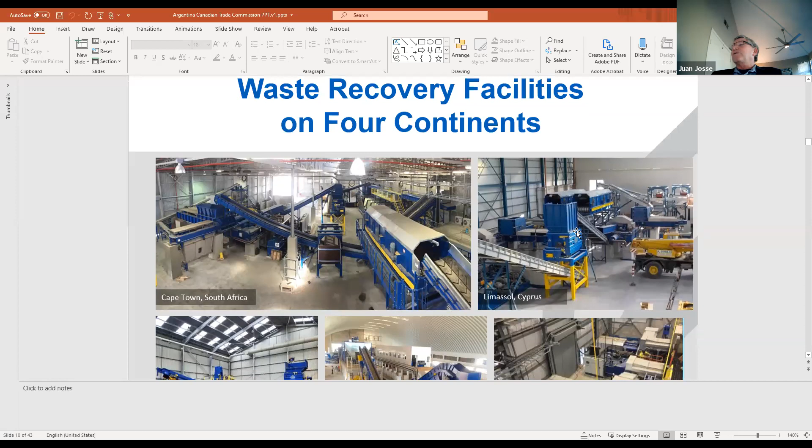Vamos a enfocarnos a plantas que tenemos en algunos continentes. Ustedes pueden ver aquí plantas en Ciudad del Cabo, en Sudáfrica, otra planta en Europa, en Limassol. Tenemos plantas en Inglaterra, en Italia, plantas en Toronto. Esto es simplemente para mostrar el tipo de plantas y equipos. En este caso estamos mostrando sistemas para desechos sólidos, sistemas para desechos de comida, como es el caso de Cardiff y de Toronto. Las otras plantas son plantas completas de desechos sólidos donde estamos extrayendo orgánicos y material reciclable y luego hacemos digestión anaerobia.

En el próximo slide estamos mostrando plantas en Norteamérica. Utilizamos una tecnología para extraer orgánicos que se llama OREX, que son prensas extrusoras, donde no importa realmente la calidad o el nivel de contaminación de los desechos urbanos. Típicamente hacemos una preseparación de la basura con tamices vastos y luego ese material va a estas prensas, y aplicando presión separamos el material orgánico de los desechos. Ese material orgánico espeso, un cake de alrededor de 30% de sólidos, lo pulimos y lo ponemos en digestores, de varias capacidades.

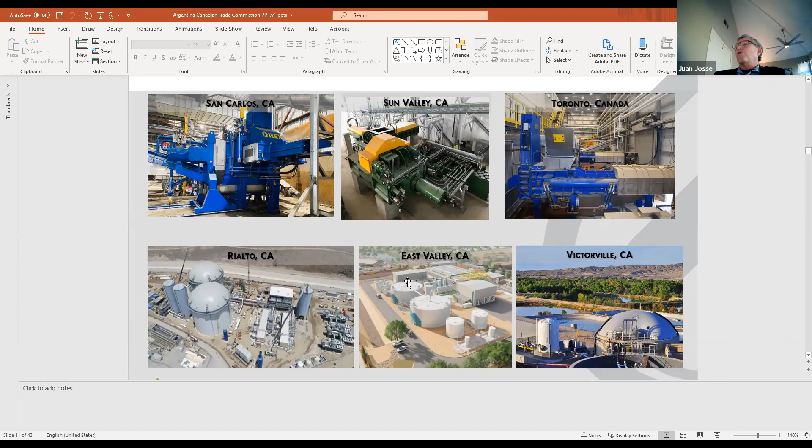En muchos casos, como en estas dos plantas, Victorville y East Valley en California, son plantas de codigestión. Cuando extraemos los orgánicos de la basura o de los desechos de comida urbanos, hacemos un pulimento y los digerimos junto con lodos en plantas de tratamiento de aguas servidas, de aguas negras. Hacemos lo que llamamos codigestión de este material, que está pulido, es muy digerible y con alto contenido de carbón, y generamos biogás junto con el lodo de las plantas.

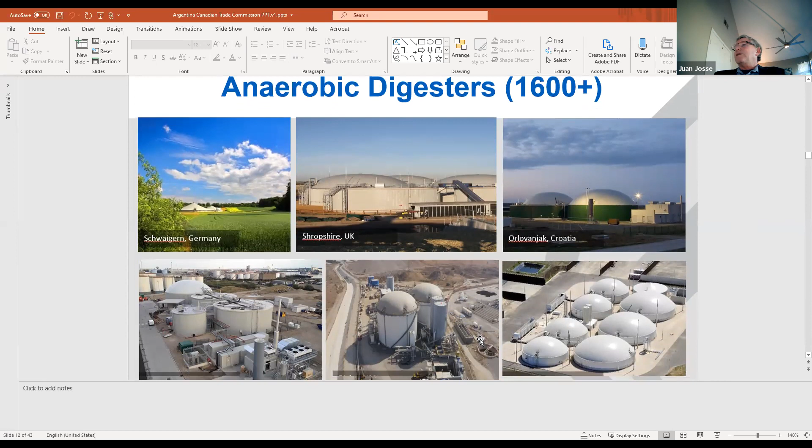En general, aquí estamos mostrando gran cantidad de digestores que tenemos en diferentes partes del mundo: digestores agrícolas, de estiércol y de desechos agrícolas, otros digestores más a nivel industrial, donde estamos digiriendo desechos de plantas que procesan cárnicos, etcétera, slaughterhouse waste, solamente para mostrar algunos ejemplos. En general, como ven, tenemos una experiencia larga en la instalación de sistemas de digestión anaerobia.

Me voy a enfocar ahora en la extracción de orgánicos de la basura y cómo nosotros pulimos los orgánicos para producir un material que es de buena calidad para ser digerible.

Esta es una parte importante porque muchas veces vemos que en las ciudades, pese a que la misma municipalidad está encargada del manejo de los desechos sólidos y del manejo de las aguas negras, típicamente son dos agencias que nunca se hablan la una a la otra, ni unen esfuerzos para tratar de solucionar problemas en conjunto. Pero nos damos cuenta que hay un gran nivel de sinergia entre estos dos tipos de agencias, porque típicamente la capacidad de digestión existe en muchas de las plantas de tratamiento de aguas servidas, de aguas negras, y estas plantas tienen una gran demanda de energía para el tratamiento de los líquidos por aireación.

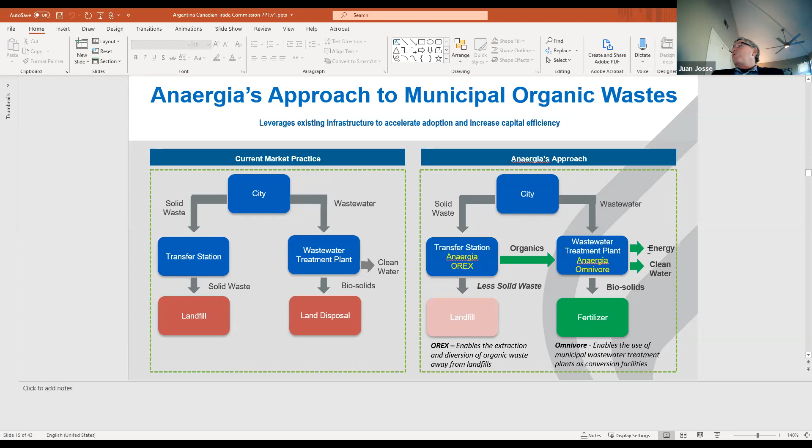Entonces, es ideal crear capacidad en esos digestores y traer material orgánico de las estaciones de transferencia de basura, extraer el material orgánico y, en lugar de mandarlo a los rellenos sanitarios, donde se genera una gran cantidad de metano que va a la atmósfera y contribuye a los gases de invernadero, es preferible extraer esos orgánicos, solo mandar los desechos no orgánicos a los botaderos, a los landfills, y traer el material orgánico a las plantas de tratamiento, que es lo que nosotros hacemos en este caso, para generar energía que puede ser utilizada por la planta de tratamiento. Y luego de esto, pues se genera energía y agua.

Esto muestra la manera más típica de hacerlo cuando podemos tratar cualquier tipo de desechos urbanos: hacer extracción, luego de eso hacer pulimento, y siempre hay las alternativas o bien de llevar el material orgánico a una planta digestora dedicada, o alternativamente pulirlo y llevarlo a una planta de tratamiento de aguas residuales, donde se puede hacer codigestión de los lodos de esa planta junto con este material orgánico que se trajo desde fuera y generar todo este tipo de recursos como gas renovable, electricidad y fertilizante.

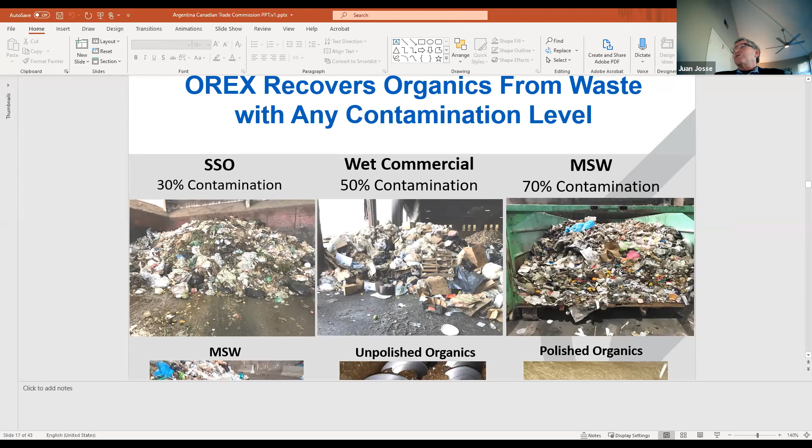El próximo nos muestra el tipo de desechos en los cuales hay material orgánico. Nosotros entendemos que realmente en muchas comunidades se trata de hacer separación de orgánicos en la fuente, a nivel residencial, etcétera. Y nos damos cuenta que pese a que haya ese esfuerzo de separar orgánicos, nunca los orgánicos vienen con, al menos en muchas partes de Europa y de Estados Unidos, nunca vienen con menos de un 30% de contaminación. Entonces, no se puede pensar que en la fuente, a nivel comercial o a nivel residencial, la separación de orgánicos es una solución de 100%. Es decir, siempre hay que tratar esto para separar plásticos, etcétera, porque siempre hay contaminación. Claro, hay menos contaminación que en los desechos sólidos. En los desechos sólidos típicamente hay 30-40% de orgánicos y el resto es contaminación.

Y el objetivo de Anaergia ha sido desarrollar tecnologías que puedan tratar y extraer orgánicos de cualquiera de estas fuentes, de cualquiera de estos desechos, sin preocuparse por el nivel de contaminación. Es decir, no podemos decir, bueno, desgraciadamente está muy contaminado y no puedo extraer los orgánicos, porque si nos vamos por ese lado, entonces estos orgánicos terminan en un relleno sanitario, generando gases de invernadero. Entonces es crítico para nosotros extraerlos y luego pulirlos para poder digerir en una planta.

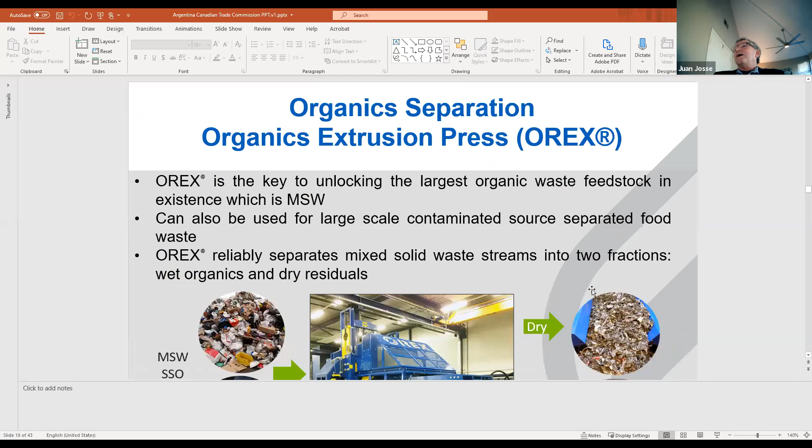El tipo de tecnología que utilizamos es OREX. OREX significa Organics Extrusion y es una prensa hidráulica de alta capacidad. Tenemos diferentes capacidades, desde 10 toneladas por hora hasta 40 toneladas por hora. Podría procesar la basura así como llega, pero la idea es que hay que separar primero cartón, etcétera, cosas que simplemente no van a generar energía. Entonces es mucho mejor separarlas primero con tamices vastos y luego la fracción que pasó esos tamices va a estas prensas.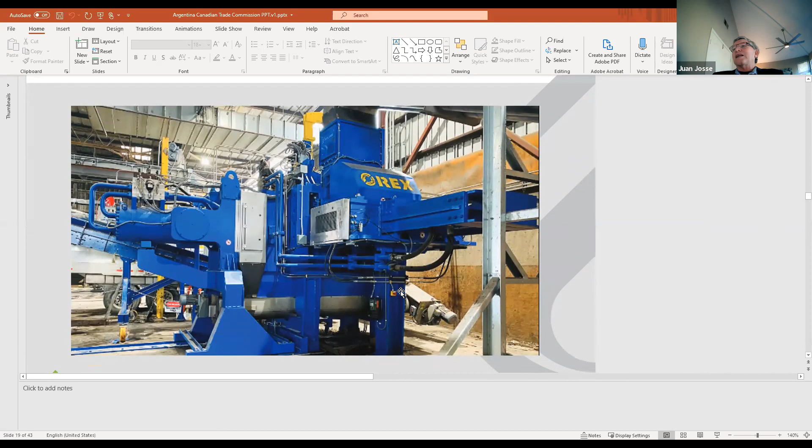Esta es una de nuestras máquinas instalada también en el norte de California, en el área de la bahía. Este es un OREX 500, de alrededor de 20 toneladas por hora de capacidad. En nuestro próximo slide, veamos.

Mi próximo slide. Perdón. No estamos viendo nada, Juan. No se ve. Okay, ahora sí. Ahora se ven todos los slides. Sí, están todos los slides. Perfecto, y poner en modo presentación. The slideshow. Desgraciadamente lo muestra en otra pantalla a la que desgraciadamente se me está dificultando el acceso. Así que lo que voy a hacer es ir.

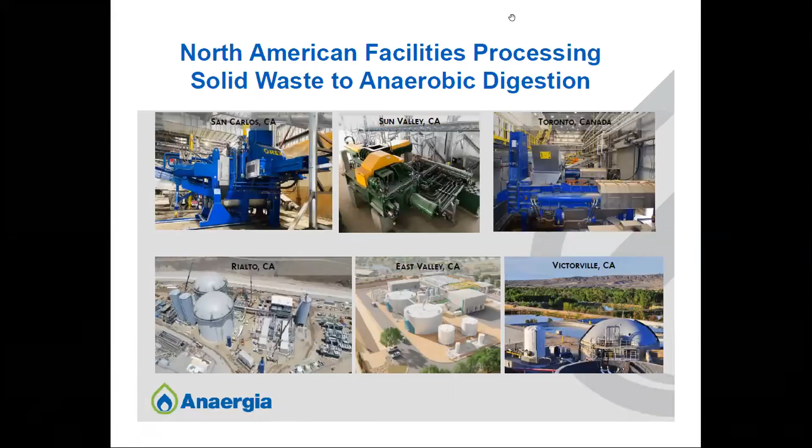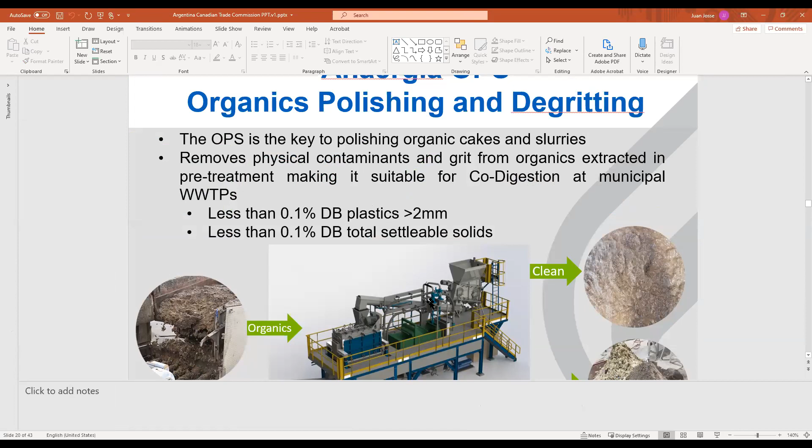Para remover plásticos alcanzamos 0.1% de plásticos de más de 2 milímetros de dimensión en base seca, y también removemos material sedimentable, arenas, vidrios, etc. Típicamente estos son los residuales que sacamos del pulidor, y este es el material limpio que va a las plantas de digestión.

Ahora me voy a enfocar a la tecnología omnívoro, que es una tecnología para digestión de altos sólidos, tanto para lodos en plantas de tratamiento como la codigestión de la que hablé, es decir, traer material orgánico externo para codigerir con los lodos en la planta de tratamiento.

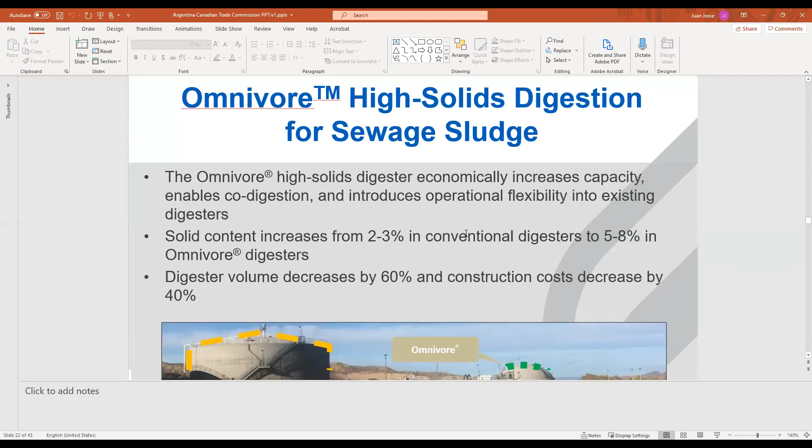Perdón, Juan, tenemos los últimos 5 minutos, por favor. Gracias. Perfecto.

Básicamente el concepto es que con espesamiento recuperativo, que se los voy a mostrar enseguida, podemos incrementar la capacidad de los digestores de 2 a 3 veces en comparación con digestores convencionales y reducir el costo de construcción.

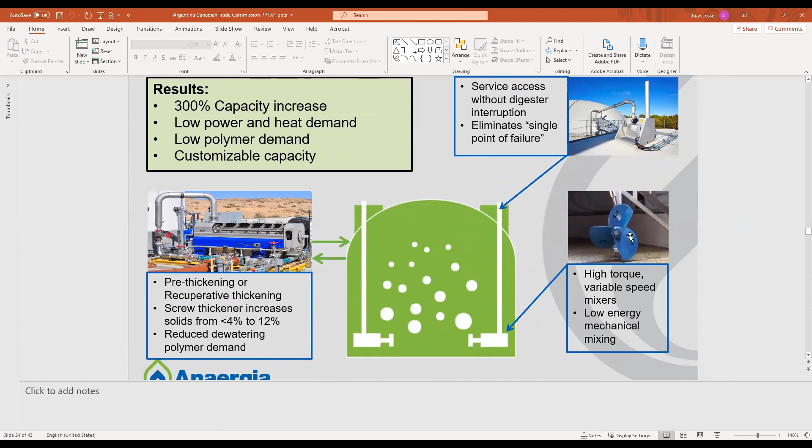Básicamente, la manera en que lo hacemos es utilizando un espesador, un thickener, que nosotros manufacturamos también, y utilizando mezcladores de altos sólidos. Y de esa manera convertimos digestores existentes en digestores de altos sólidos. Aquí ustedes ven el tipo de mezcladores que utilizamos y las cajas de servicio para acceder a los mezcladores.

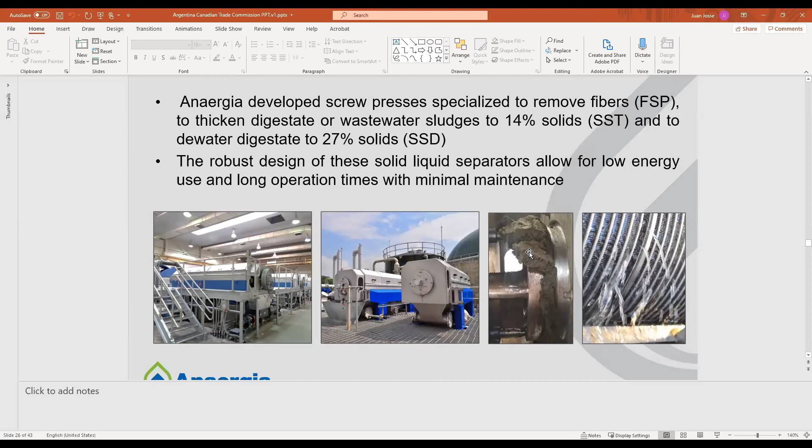Luego les muestro en este slide los tipos de separación que hacemos. Estos son nuestros espesadores. Ustedes ven aquí el líquido saliendo, y este material lo retornamos a los digestores, o podemos hacer espesamiento antes de la digestión para mandar sólidos en lugar de agua a los digestores.

Típicamente esto reduce el costo de digestores municipales y facilita la codigestión con material externo. Luego, en el área industrial, típicamente nosotros utilizamos esta misma tecnología para efluentes líquidos, y la idea aquí es básicamente, en lugar de utilizar lodos granulares, UASBs, etcétera, cuando tienen los efluentes industriales, sólidos suspendidos altos y grasas, etcétera, hay que hacer pretratamiento. En nuestro caso, nosotros evitamos hacer pretratamiento.

Cuando se utiliza lodos granulares, nosotros evitamos hacer pretratamiento y simplemente digerimos todo junto, y luego desacoplamos el tiempo de retención hidráulica y el tiempo de retención de sólidos con estos espesadores recuperativos. Y eso tiene varias ventajas en cuanto a costo en general, porque no tenemos que separar y hacer tratamiento por separado de los sólidos.

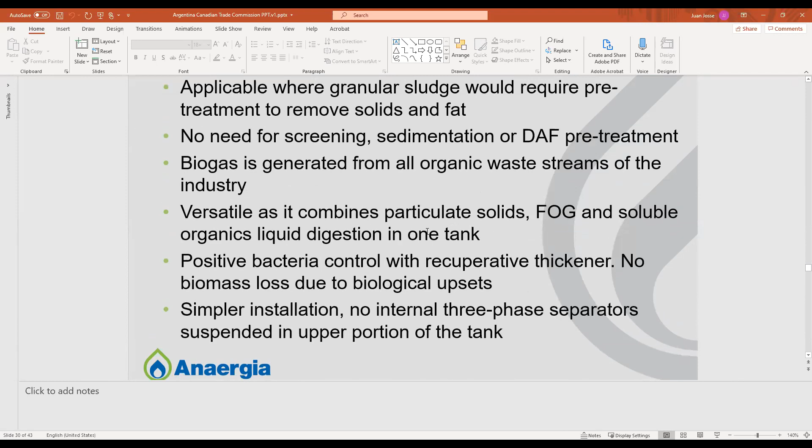Voy a enfocarme en algunas de las plantas, mostrarles algunas de las plantas. Este es el espesamiento recuperativo que utilizamos, y voy a terminar la presentación mostrando algunas referencias.

Por ejemplo, tenemos la planta de Sterksel, una planta que ahora ya está en arranque en Holanda, una planta muy grande que hace biometano para inyección en la red a partir de estiércol de cerdos, desechos de comida y grass silage, es básicamente pasto ensilado. Y aquí ustedes ven nuestros sistemas de conversión de biogás a biometano.

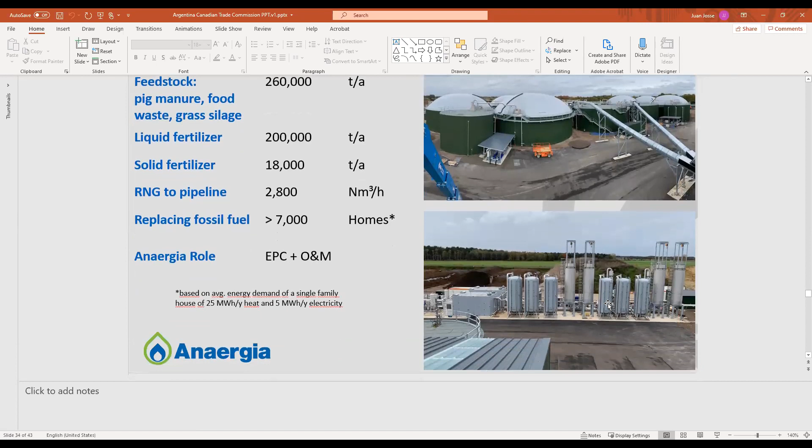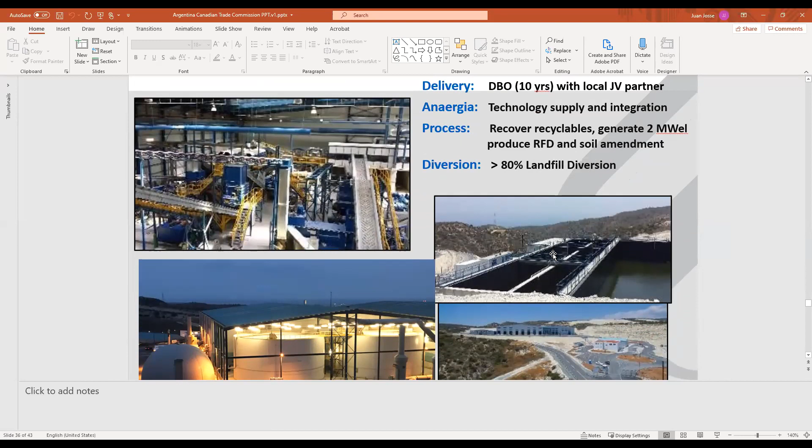Esta es nuestra planta en Limassol, en Chipre, donde manejamos alrededor de 500 toneladas al día de desechos sólidos y generamos biogás y efluente de alta calidad.

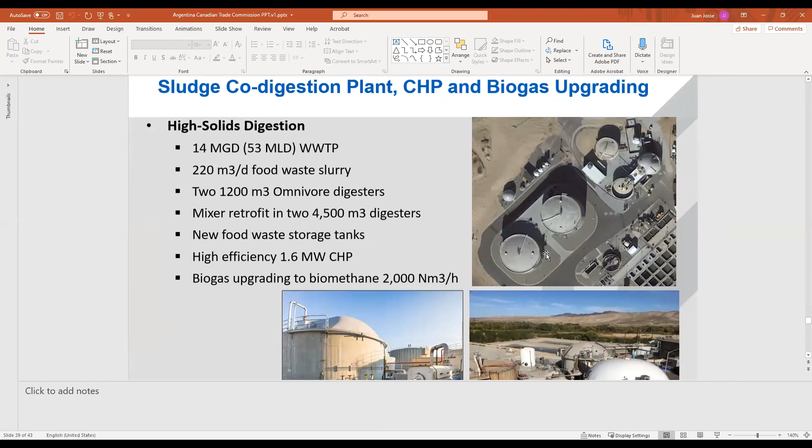Y finalmente, otras plantas donde hemos hecho lo mismo, estas son plantas de codigestión, donde hemos hecho conversiones a digestores existentes aplicando la tecnología Omnivore. Una planta muy grande en New Jersey, que ahora ya está en operación, donde convertimos unos tanques existentes para almacenamiento de lodos, los convertimos en digestores.

Aquí tienen ya la planta en operación. Esta planta genera 3.8 megavatios de electricidad. Nosotros hicimos toda esta instalación. Aquí tienen ustedes los motores, el almacenamiento de gas y los tanques convertidos a digestores de alta capacidad.

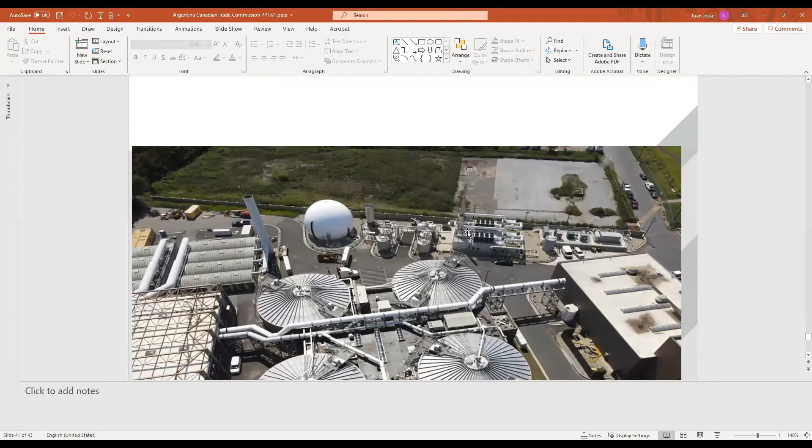Y finalmente, en efluentes industriales, es una planta en Sudáfrica, donde una planta industrial está en construcción un poco demorada por COVID, pero esta planta empezará a mediados del año siguiente. Y aquí también tenemos líquidos y tenemos sólidos de destilería utilizando uvas. Y en esta planta también vamos a generar 2 megavatios de electricidad. Es una planta industrial que trata líquidos y trata sólidos.

Con esto, les agradezco mucho por su atención y estoy abierto a cualquier pregunta que ustedes tengan.